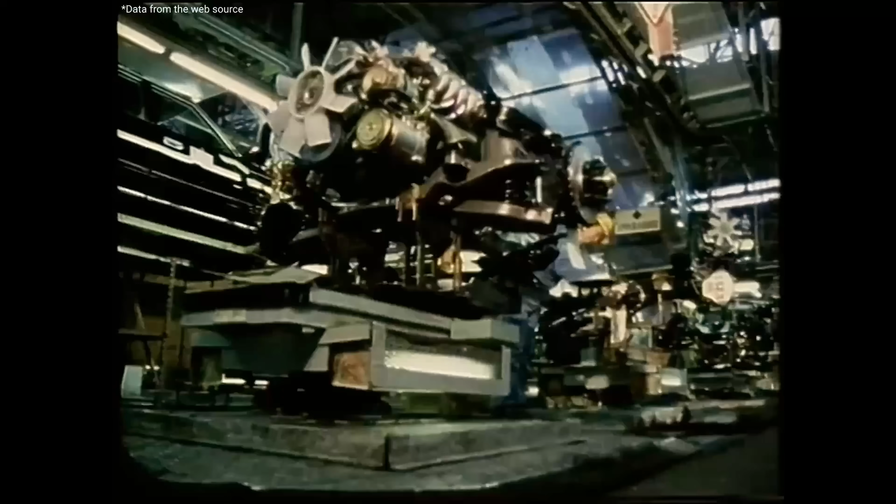The opportunities created by a globalizing economy became evident, and we seized them. We formed partnerships with companies from Japan, combining our expertise and vision to raise the standards of casting excellence. This collaboration led to the founding of Zhongyan Casting.

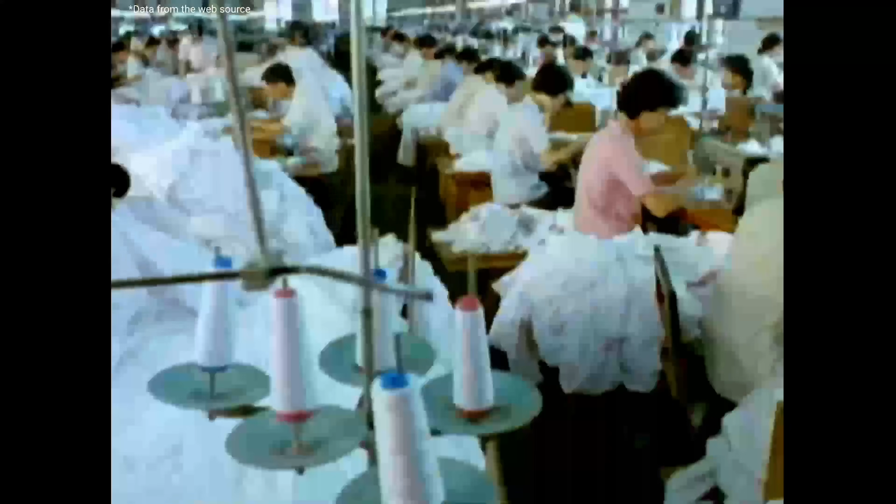In 2001, with the reduction of tariffs and the rapid growth of international trade, we were presented with new opportunities to work with companies across borders. We ensured that our products met international standards, and in doing so, Zhongyan Casting began making its mark in global markets.

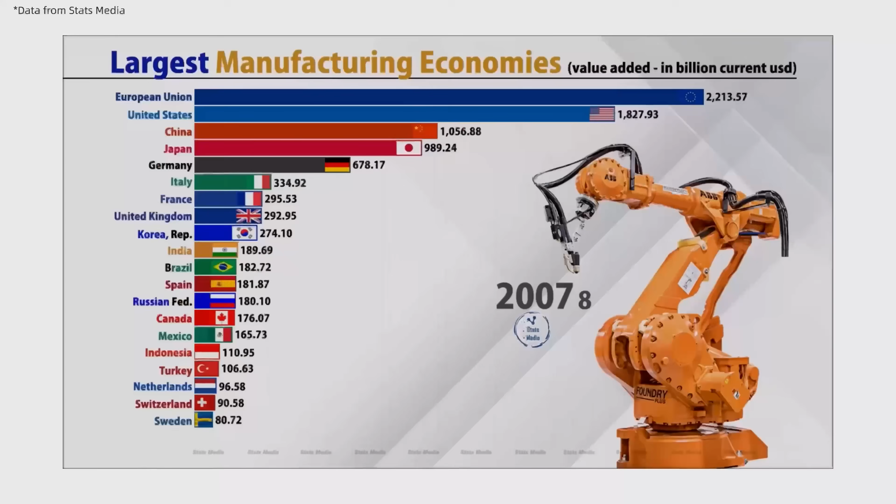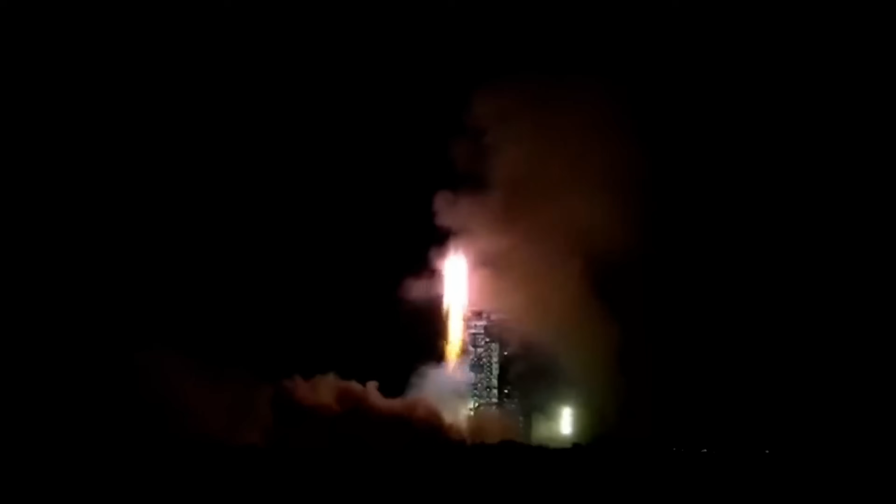By 2010, the landscape of global manufacturing had shifted dramatically, with industries around the world increasingly demanding precision and quality.

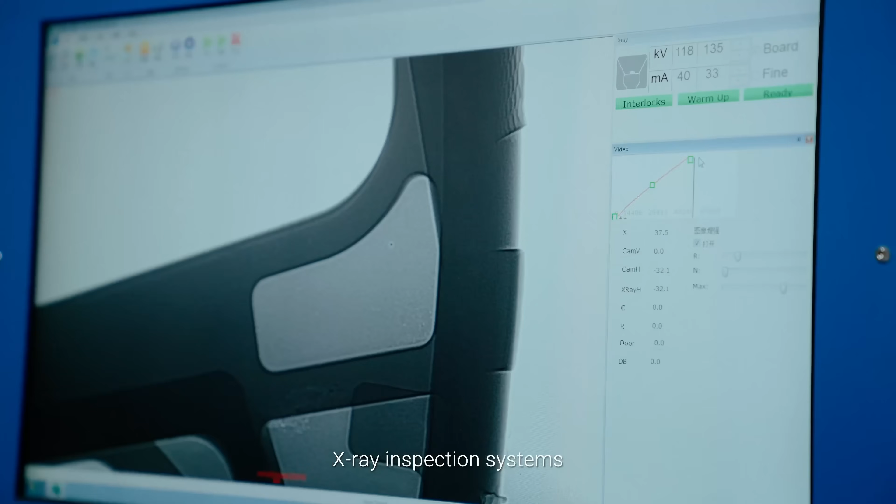The rise of advanced technologies such as coordinate measuring machines, X-ray inspection systems, and state-of-the-art casting technology allowed us to meet these evolving demands. This dedication to innovation helped us attract clients in high-precision fields, and we were honored to win a casting order for CHSR doors.

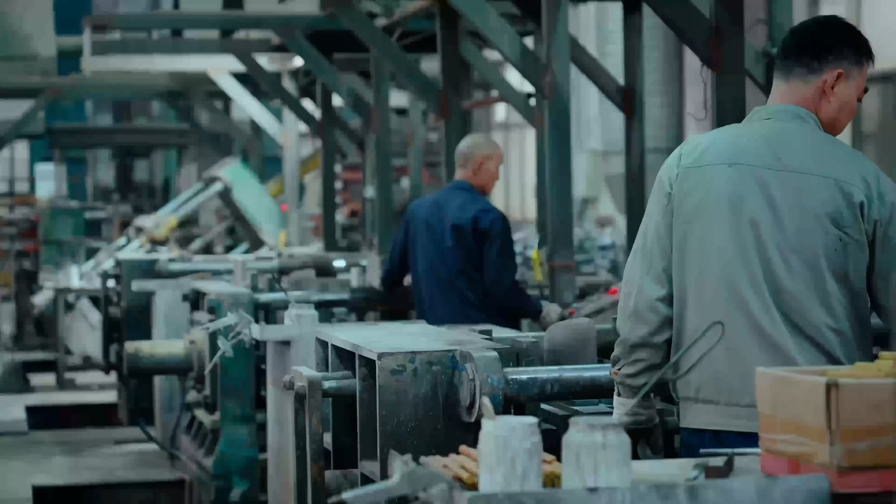Looking back, the journey has been shaped by our embrace of new technologies and our willingness to challenge ourselves. But just as we had risen to meet one challenge, another arrived.

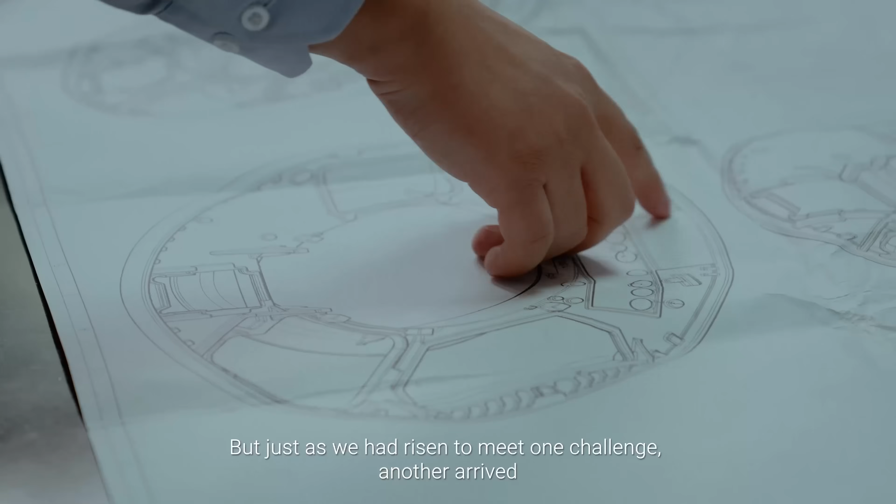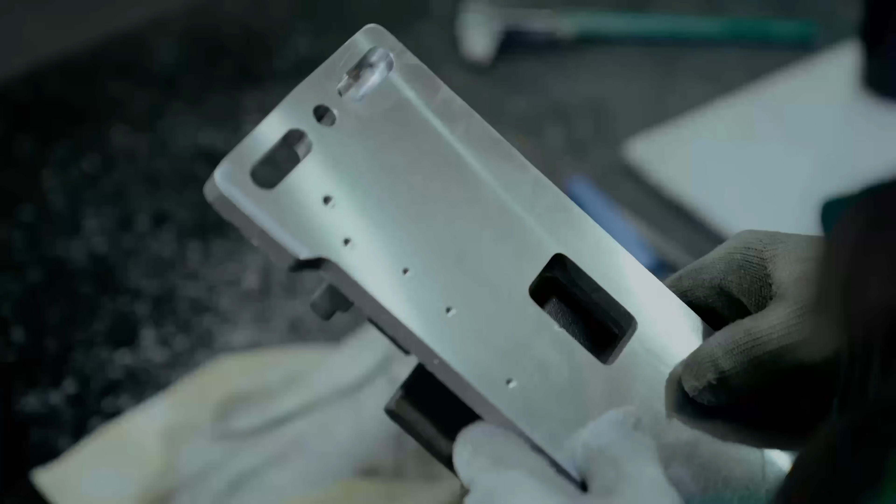One day, Siemens sent us their drawing documents. We had heard of their rigorous standards, but we did not realize how high the requirements were for their medical device parts: material hardness, dimensional accuracy, surface finish. Each specification seemed more demanding than the last.

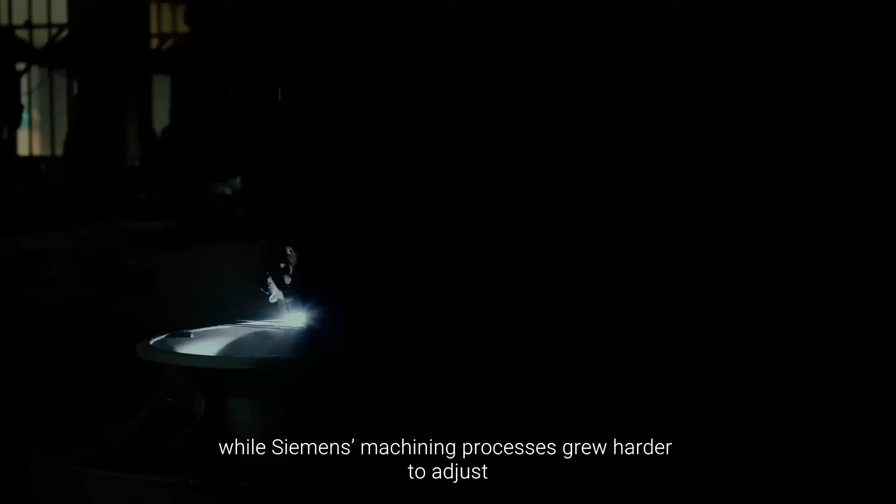As the partnership deepened, the scale and complexity of the castings increased, while Siemens's machining processes grew harder to adjust. Any misalignment of the reference datum would disrupt the assembly process. Our existing measurement tools were not up to the task.

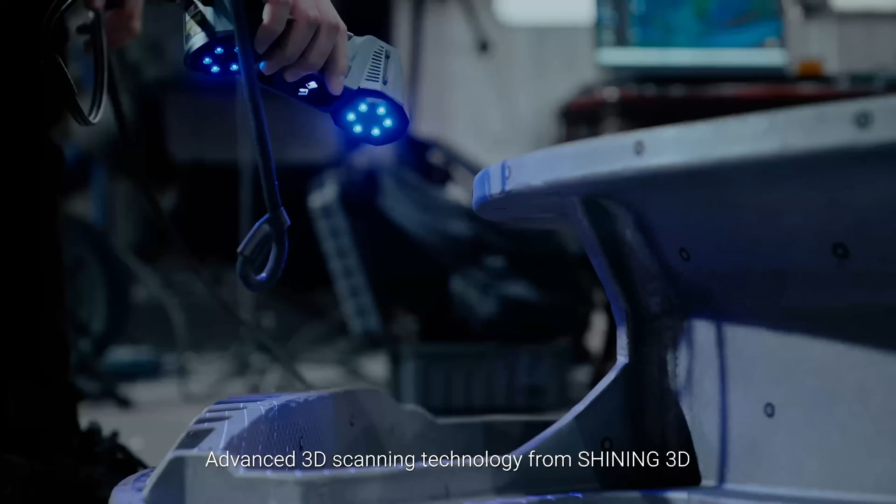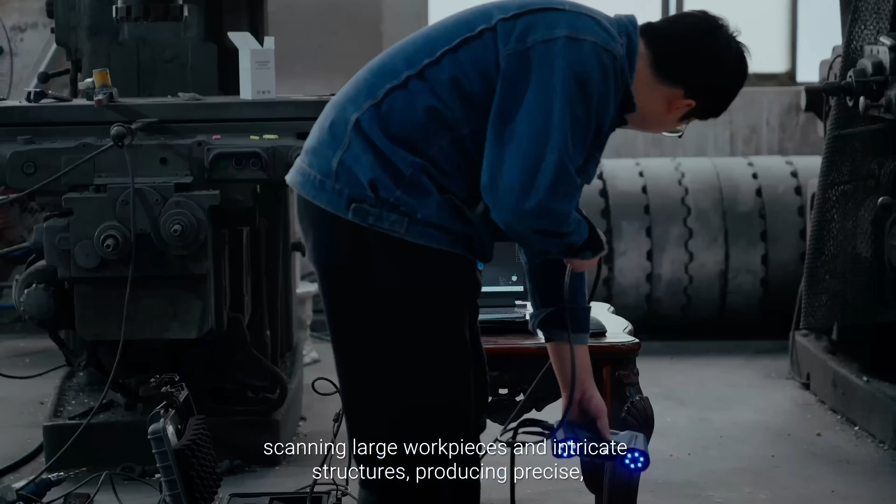That's when a pivotal moment occurred. Advanced 3D scanning technology from Shining 3D transformed our approach to these manufacturing challenges. Shining 3D engineers brought in scanning equipment capable of scanning large workpieces and intricate structures, producing precise, full-size models in just minutes.

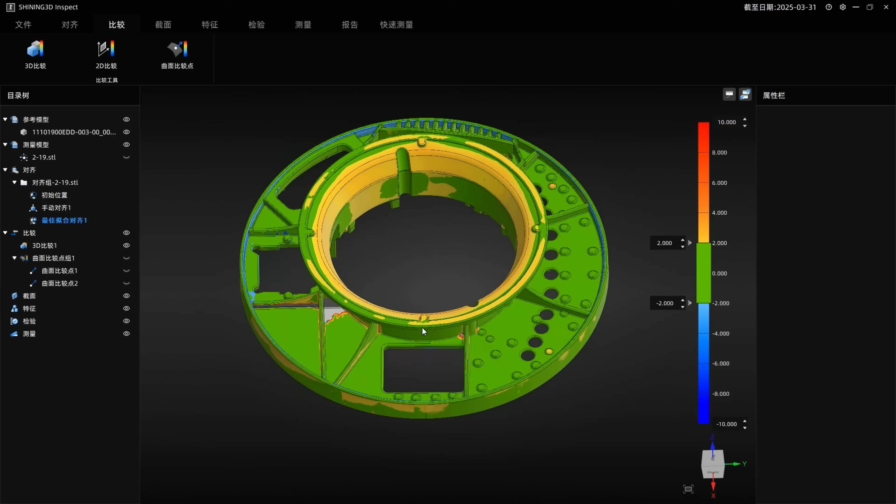Their expertise in casting and measurement offered a solution to the misalignment problem. By comparing the scanned data with the digital model, we could pinpoint the deviations and adjust the workpiece datum to align perfectly with Siemens's stringent machining process. This breakthrough resolved the long-standing issue, and the acceptance process went smoothly. With the support of 3D digitizing technology, Zhongyan Casting once again positioned itself ahead of the curve.

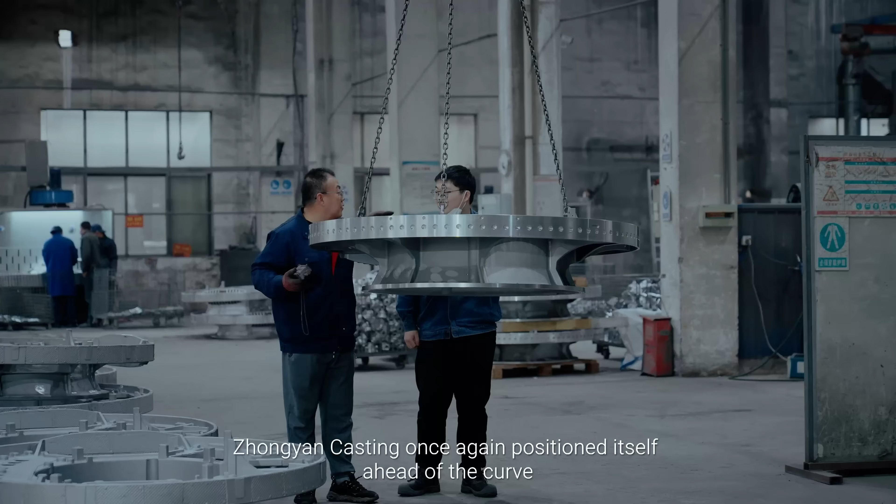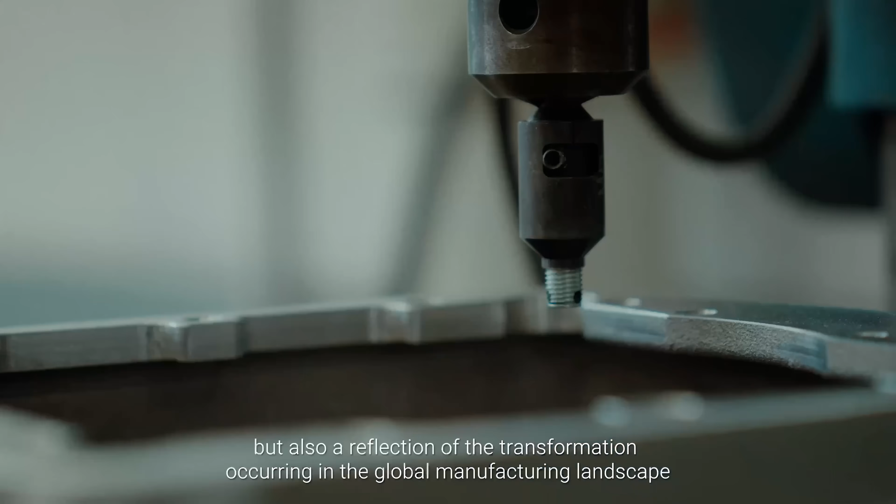The journey of Zhongyan Casting is not just a testament to the evolution of industrial inspection tools, but also a reflection of the transformation occurring in the global manufacturing landscape. Today, we continue to embrace the future with optimism. Together with Shining 3D, we will leverage innovative technologies to drive precision manufacturing, setting new benchmarks and contributing to the future of industries worldwide.